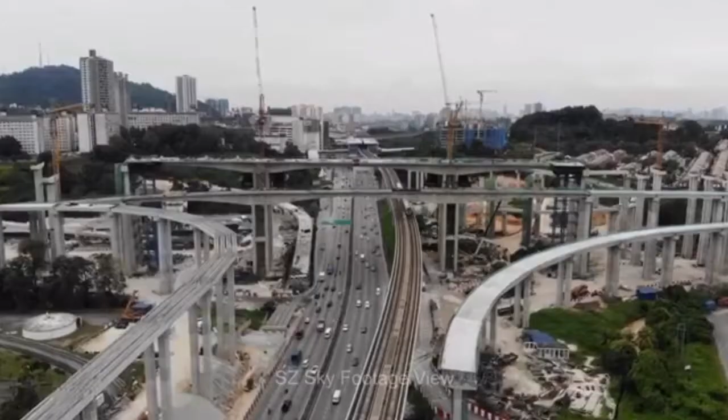Kuala Lumpur is a modern city. The capital of Malaysia is filled with offices, commercial centers, and some residential areas, symbolizing the modern lifestyle of the people. Besides the internet and smartphones, cars are an important element for fast living. Despite being so crucial, cars are left out, used frequently but often ignored by the people.

Frank Lloyd Wright once criticized this sort of behavior. He said, leaving the automobiles in which they now really live and have their beings, still parked aside, betrayed, abandoned as usual. So why is this happening? Why can't we just drive our cars into the building? And Wright did exactly that.

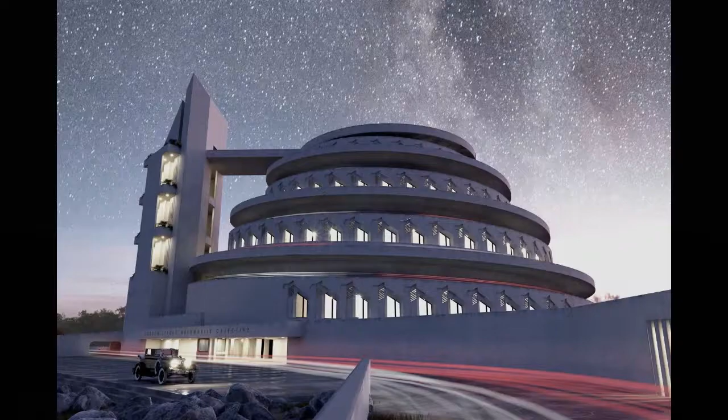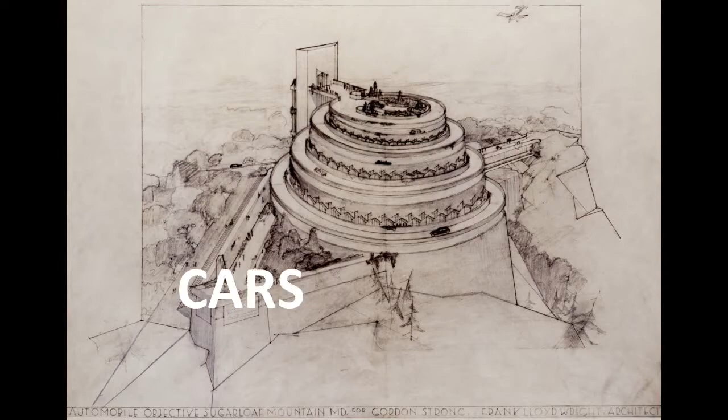This is the Gordon Strong Automobile Project, commissioned and made by Wright. He introduces spiral ramps so that users can go around to the top of the hill while enjoying the scenery along the way, basically having cars as part of the whole journey. However, it didn't come to fruition.

I yearn for a balance between the two elements, people and cars. So for this project, I explore the challenges and possibilities to achieve the dream of an alternative architectural solution, an architecture for the cars and for the people.

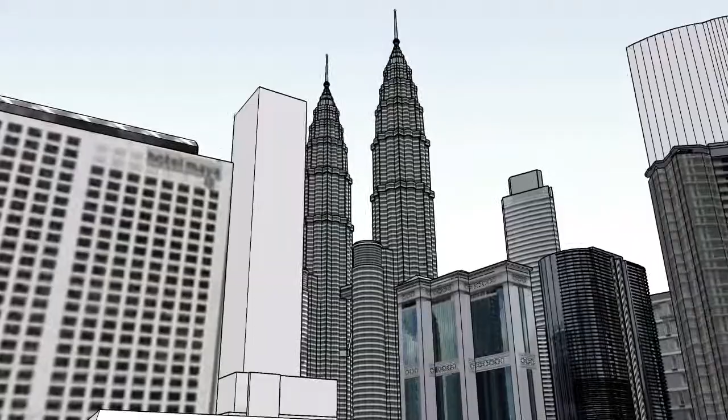The site, around 1.4 acre, is located at Jalan Ampang, a flat and open land surrounded by high structures, a valley in the urban jungle, potentially being a node for the surrounding area. Nodes in general in the urban landscape determine the livelihood of the community. Thus, by nurturing this place into a recreational area, we can help elevate the living experience for the people of this part of the city.

Having two elements identified, cars and people, we can list down a few functions that are common ground for both, such as drive-through, car wash, rooftop, drive-through cinema, and a shopping area. These elements play a crucial role in conceptual development. Before a mass can be placed, via zoning process, we can recognize different zones for respective functions that correspond to the site.

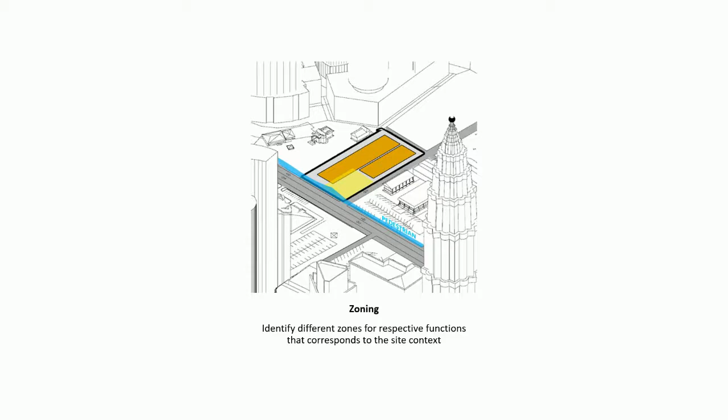A massing of 5 levels tall is maximized according to the guidelines. As a response to the valley-like skyline, the front area of the site is sunken to provide depth and visual excitement. The pedestrian and car pathways are redirected for access and a more natural experience into the building.

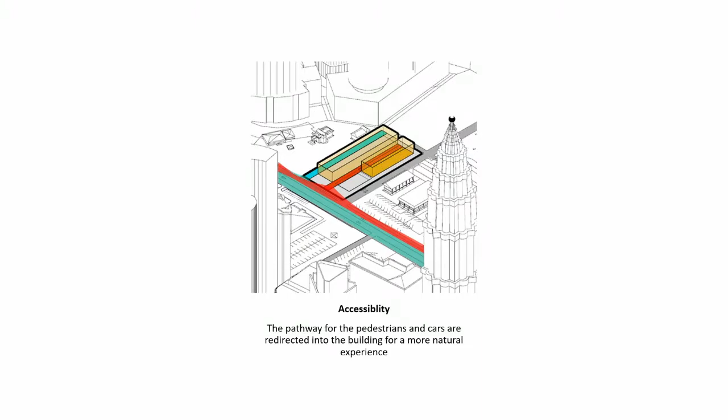Diagonal elements are introduced, such as stairs and car ramps, to connect each floor. Louvers and other shading devices complete the building, which also allows for natural daylight and ventilation into the spaces.

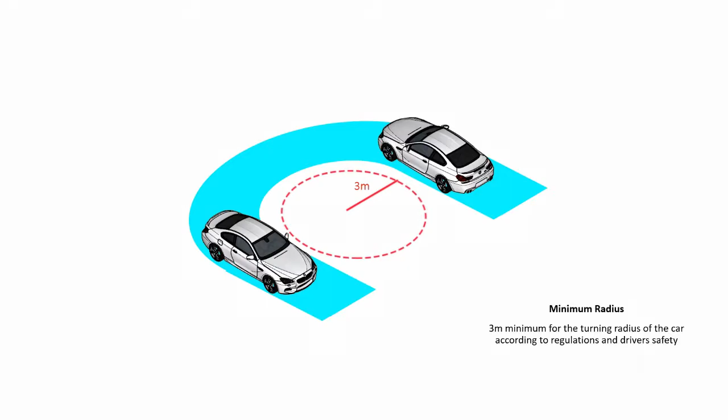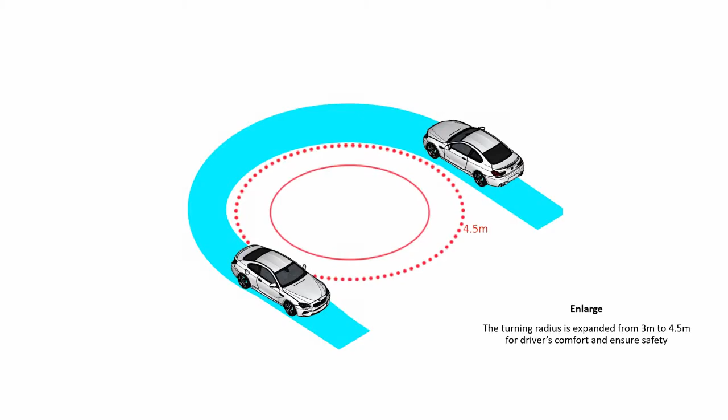One of the most crucial elements of the concept is the car ramp system. In order to develop this, we need to understand the physical and psychological limitations and features for cars and drivers. Firstly, recognizing the minimum turning radius, which is 3 meters. The turning radius is then expanded to 4.5 meters for driving comfort. We also add an opposite lane for efficiency.

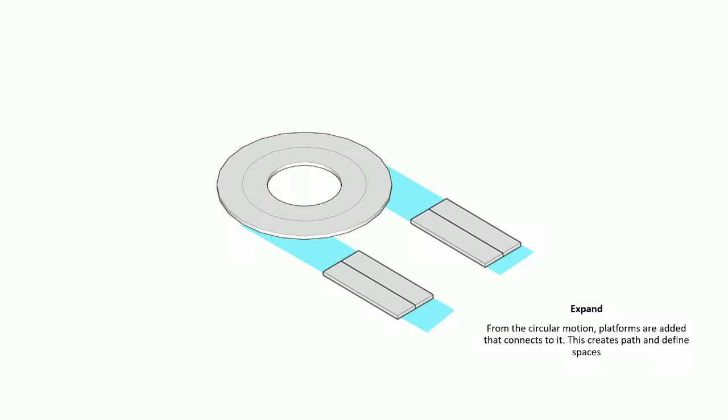Then adding platforms that connect to the radius, which in turn creates paths and helps in defining the spaces. A grid system is developed according to the design, with a maximum span of 8.5 meters. As a result, the spaces defined are much bigger. The grid system was developed based on Le Corbusier's Villa Savoye.

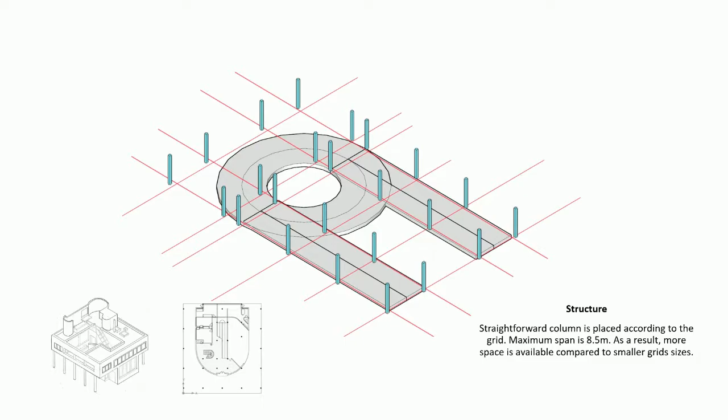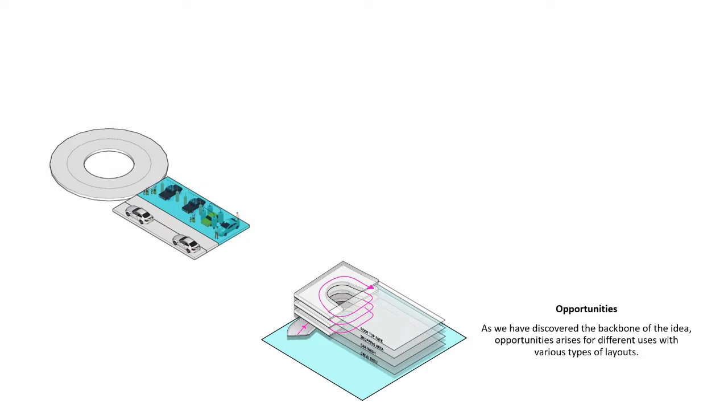A spiral ramp is introduced, as it is a continuous method of traveling throughout different floors. As the backbone of the idea is discovered, it opens up various opportunities for vehicular spaces within different layouts, among the examples such as parks, car wash, and cafe. This formula allows both the drivers and people to benefit and coexist with one another.

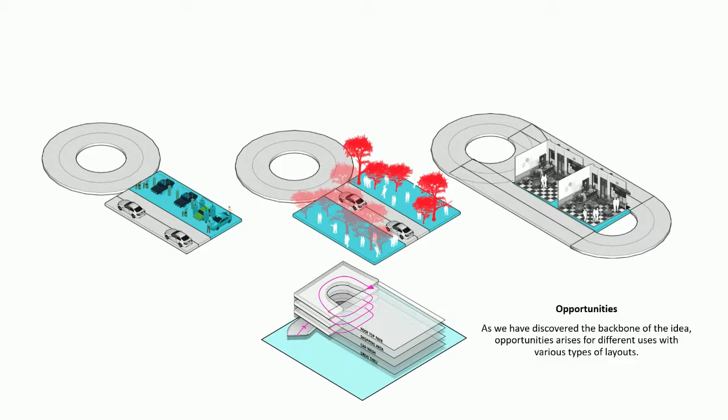Now let's talk about the building program. The first thing is we introduce the ground floor for the people so that it appears much more welcoming to the pedestrians from the street view. The car functions are raised above, located on the upper floors.

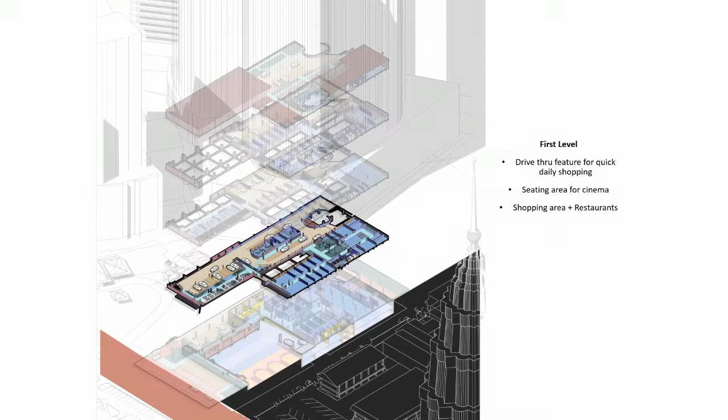On the first floor, there's a drive-through for quick shopping, a seating area for the cinema, shopping area, and restaurants. Having car wash, library, and another seating area at the second floor, and more shopping area which continues to the third floor. Not to forget a terrace park, plus recreational spaces for the rooftop.

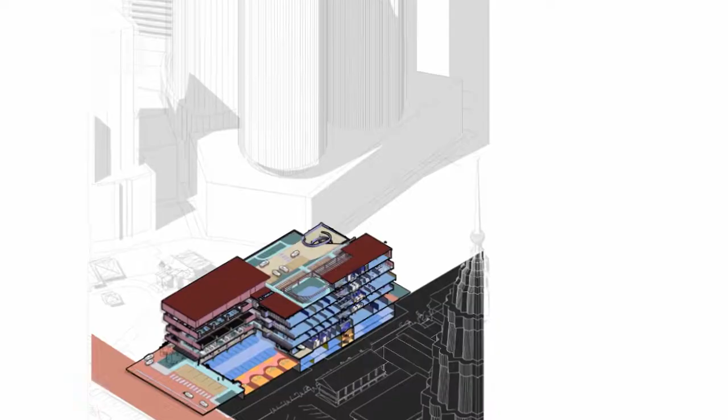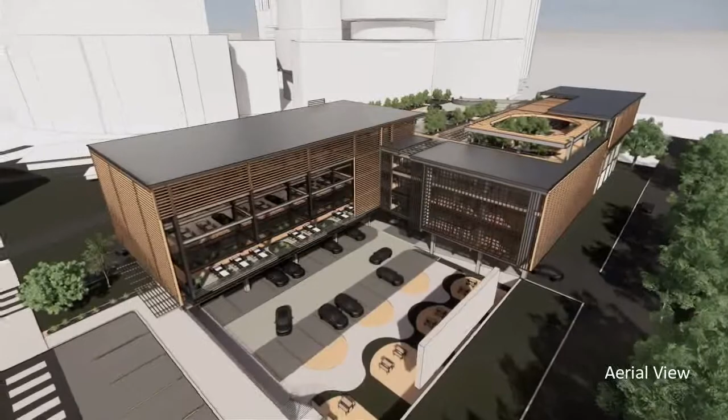Now is the part that you've been waiting for, the walkthrough. Similar to the idea of a progressive nature of humans, the building adapts to modernist style. Inspired by Wright's automobile objective, the project explores the idea of cars being able to go around the building to enjoy the journey towards the rooftop recreational area.

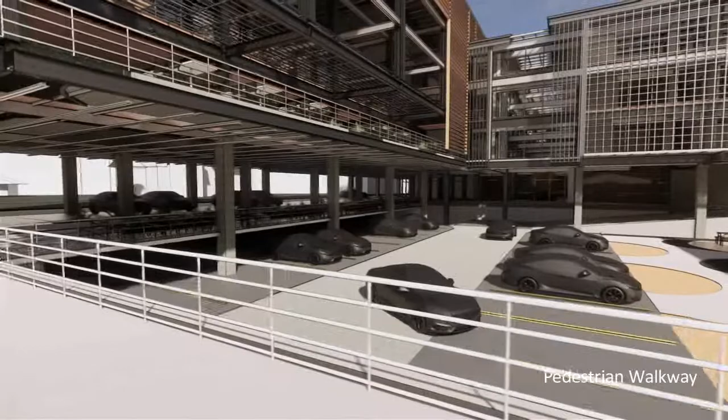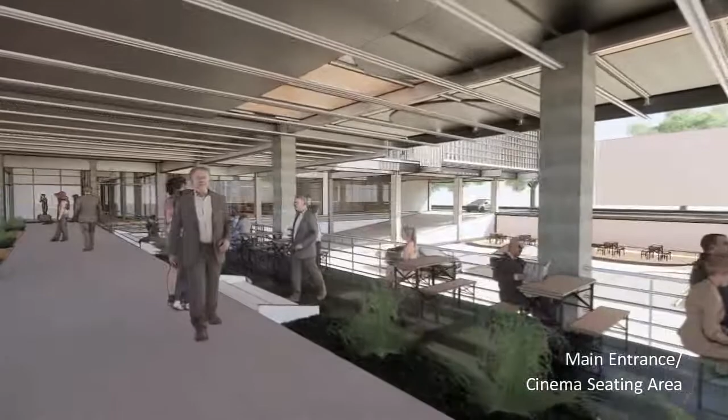As pedestrians walk by the building, the cinema, which is sunken at the front part of the design, gives a much more exciting visual for them. Through the main entrance, users can experience cars on one side and people sitting on the other as they enjoy the cinema. As people enter the atrium, they are greeted by the skylight.

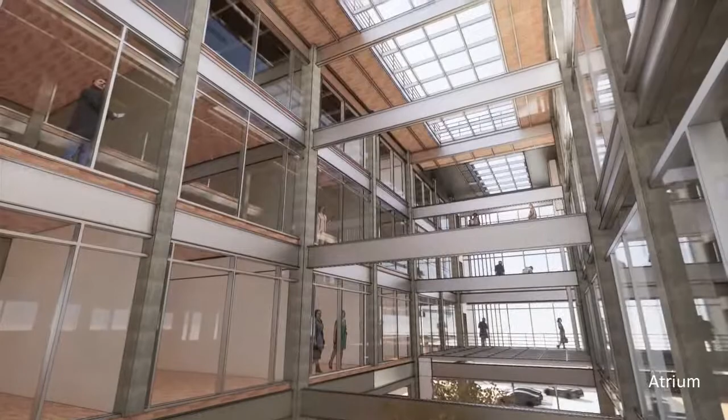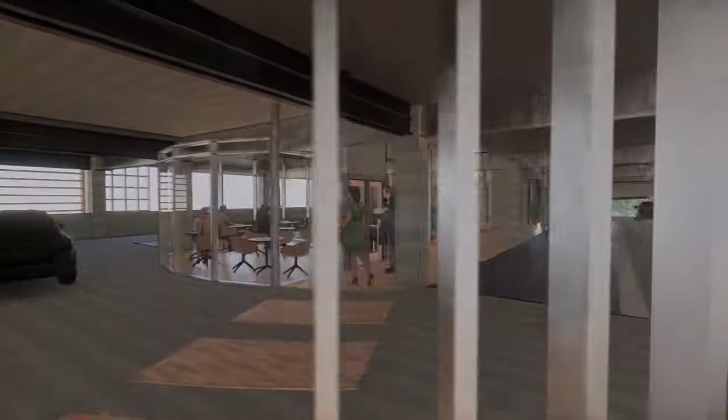The feature that you don't want to miss is the drive-thru, a cafe in the middle of a radius, allowing people to dine and experience vehicular exhibition as cars circulate around it, symbolizing the progressive lifestyle of modern society. Drivers can then make their way to the cinema sitting at the same floor.

The cinema is an important feature as it enables its users to enjoy movies together while at the same time their friends get up to shopping. From the atrium, people can observe different vehicular activities such as car wash and drive-thru.

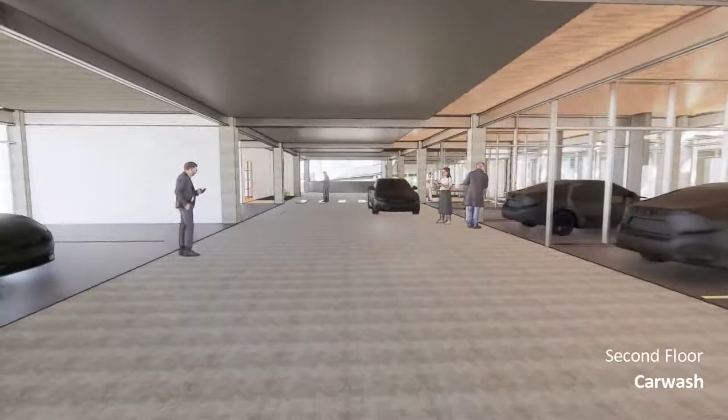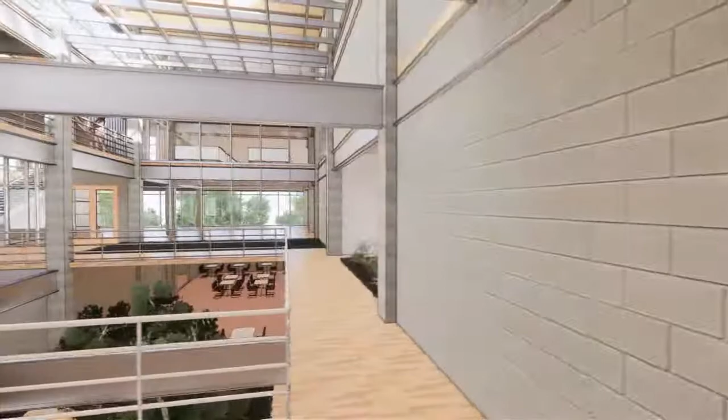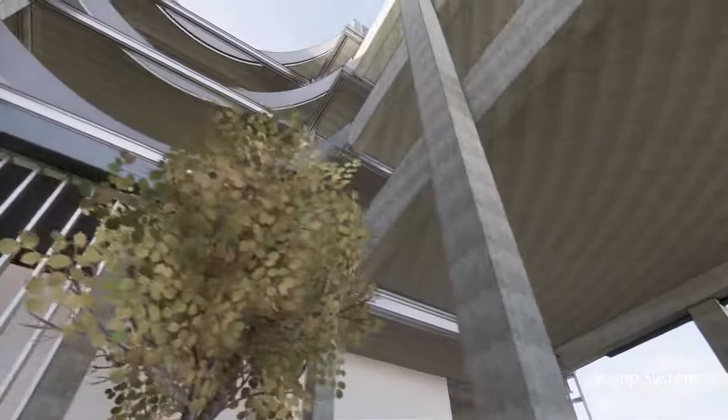Besides that, drivers can make their way seamlessly up to the level above for recreational activities.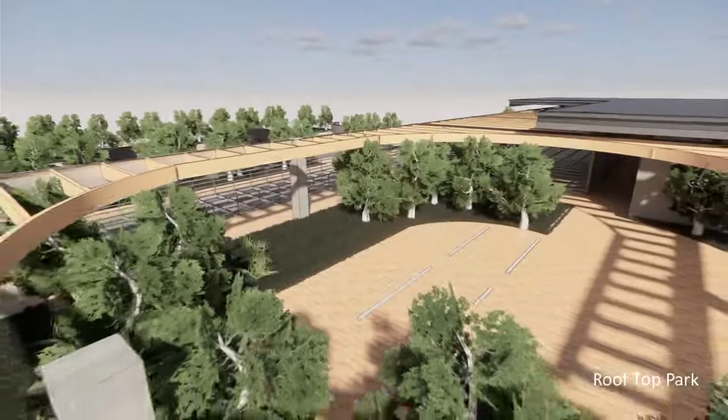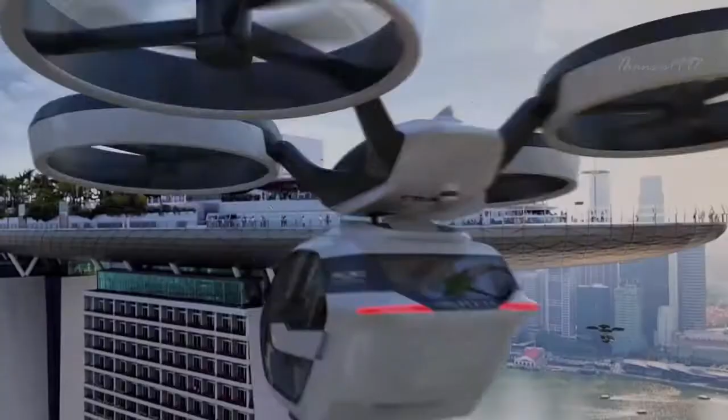There were a lot of considerations and challenges that needed to be addressed along the design process. However, by finding the common ground between two different elements, a balance for drivers and pedestrians can be reached. Thus, another step closer for the future where technology and humans can coexist together. That is all from me.